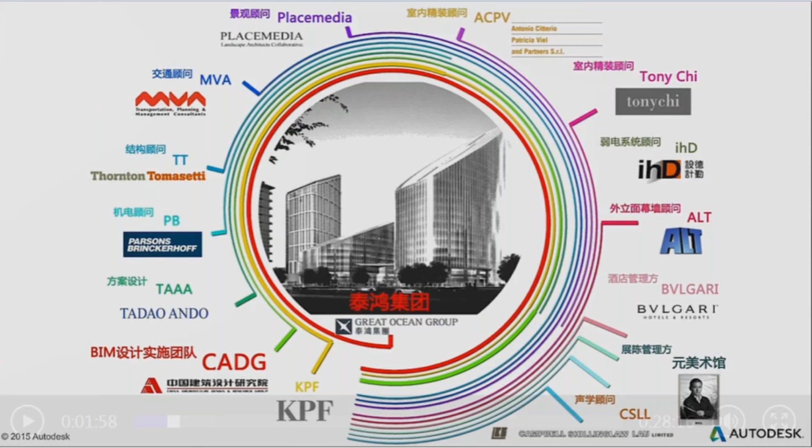Then COVID hit. Usage of remote access skyrocketed as designers and engineers worked from home. Autodesk responded with promotions to help these users become productive by using BIM 360. It seems like everybody was using BIM 360 to share design data.

But Autodesk has always had this vision of connecting all the people on the project. Design users needed to have their tools talk to each other, and construction users needed to have all up-to-date information for their people. And building owners, construction managers, and owners reps all needed to stay current with the data.

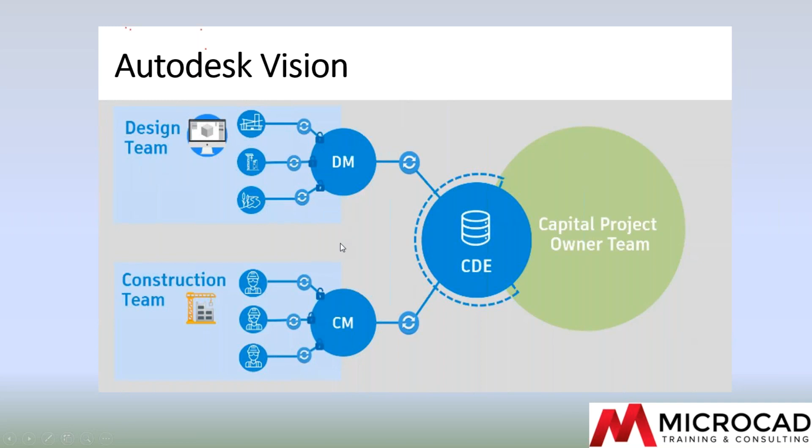With Autodesk's first early product called Team, it was the Revit users that were connected. With BIM 360, it expanded to the entire design team, but it missed connecting to the construction group because they were on a different platform, the Autodesk Construction Cloud.

This was an important gap because of the huge benefits that could be gained by the integration of the data, but also more and more the lines between designers, construction administration, coordination, and owner reps were blurring. Every organization was branching out to create new revenue streams, resulting in their involvement in more activities in the project. So designers were doing construction functions, and some construction people were involved in design functions.

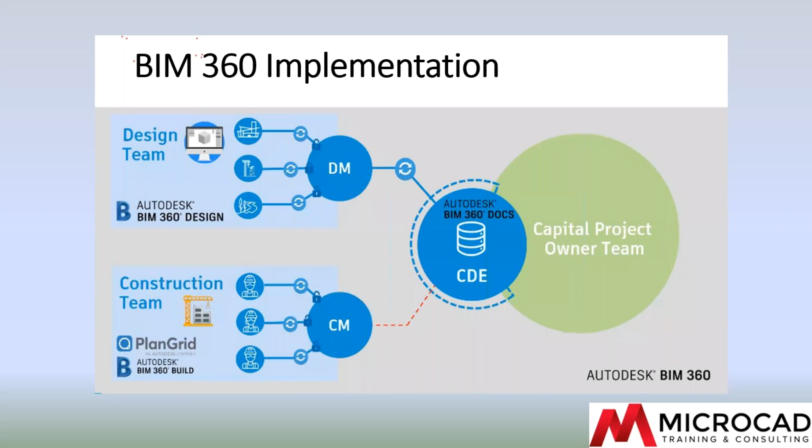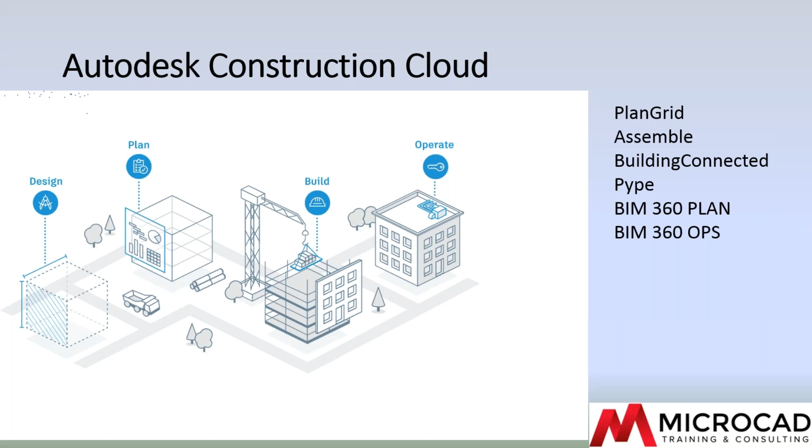So now Autodesk has connected all the members of a team on a common data platform, the unified platform. Data can be shared seamlessly from conceptual design through construction to operation of the facility, and all the stakeholders can access information anywhere on any device.

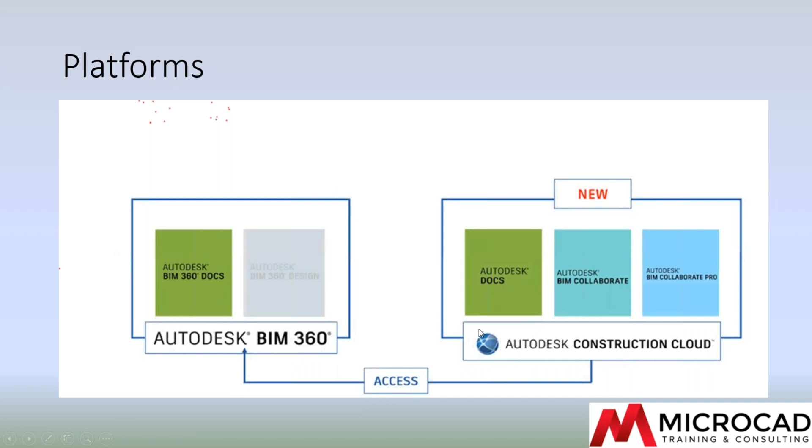The key feature of these products is the ability to use the unified platform within Autodesk Construction Cloud. Currently, BIM 360 Docs and BIM 360 Design operate within the Autodesk BIM 360 platform. The new products, Docs, BIM Collaborate, and BIM Collaborate Pro, are able to work on the unified platform and also on the BIM 360 platform. So you have access to either of these platforms with the new products.

Autodesk Docs is a document management product for all partners in the project. It controls versions in the cloud, so every user is guaranteed the most recent data. Users can set permissions to control who has access and what kind of access. It allows users to view, measure, and mark up models and drawings. It provides the capability to create and manage issues, assign them to individuals, and give a due date.

What is significantly different with Autodesk Docs is that it allows bring your own subscription. What this means is that each organization's Autodesk Docs subscriptions could be used on anybody's projects once you are invited. This is a more predictable way of getting entitlements.

BIM 360 Docs works differently. For BIM 360 Docs, whoever owned the data had to provide the BIM 360 Docs entitlements. Another major point that's different about Autodesk Docs is that this is included in the AEC collection. This means every Revit or AutoCAD user who has the AEC collection has access to cloud data sharing. Autodesk wants all of the software users to be able to work with cloud data.

Autodesk Docs is not available outside of the collection. The interface for Autodesk Docs is fairly intuitive and similar to BIM 360 Docs. Files are organized by project and folders within the projects. For each Revit model, both the 3D representation and sets of drawings are available. It's an intelligent model, so you can query the properties of an object in the model.

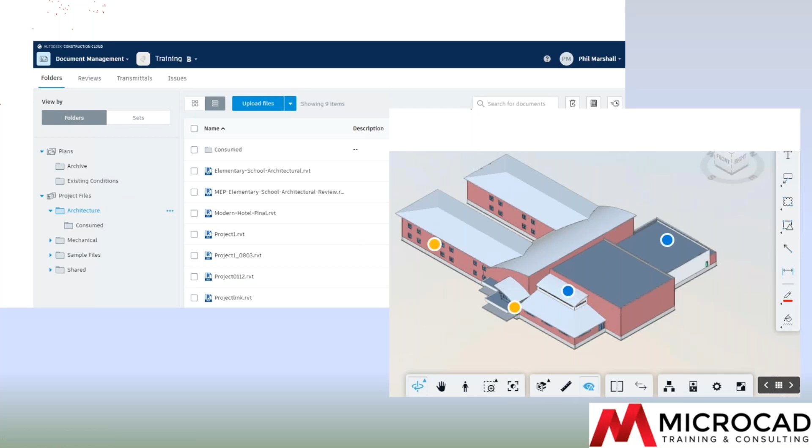Let's take a quick look at what that might look like.

So here we are looking at a particular project. We could have a number of different projects that we're involved with, but we're choosing one particular project. Within this project, we have a set of folders that we could use. Then within the folders, we can establish permissions of who has access to look at, to view, to edit, and work with these particular files.

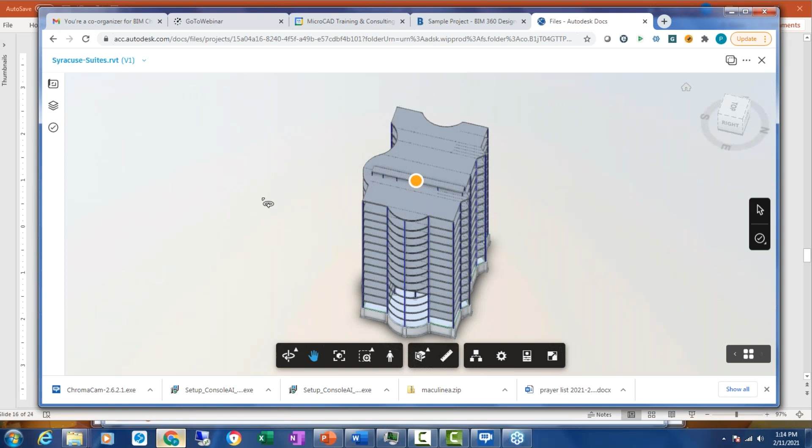So if we grab one of these files, this is a Revit model. And as with any Revit model, we certainly have the ability to do things like view, pan, zoom, orbit, and have all of these abilities for sectioning. So we could look at the inside of the building, slice it, see what's going on right here. So even if it's a complex model, we have a lot of understanding of what's going on with that model.

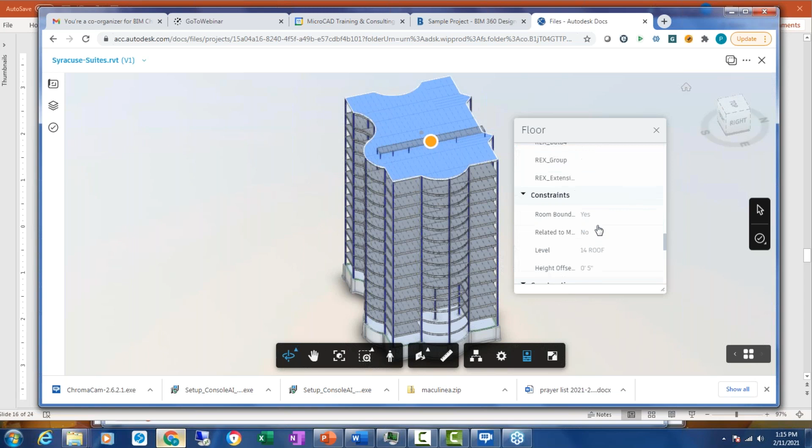It is a Revit intelligent model. So if we pick an object, like I'll pick that particular floor, we can look at the properties of that floor and see that it's lightweight concrete on metal deck. We'd have the rebar information, and we'd have things like weights and center of gravities, the strength of the concrete, and whether or not it's been involved in an analysis. So we have all the information about that particular object.

The second product I'd like to mention briefly is Autodesk BIM Collaborate, which is aimed at project participants who need to be involved in the review and approval process, but aren't authors. So these might be people like the design managers, the project leaders, maybe some client personnel, people who need to be aware of what's going on, but are not going to be the authors.

This product includes all the features of Autodesk Docs, plus model coordination and design collaboration. Model coordination allows users to find and manage interferences. Design collaboration lets users participate in review workflows, see the design packages released by the various teams, and review the history of the design releases. It's not intended for the engineers and designers who are authoring models.

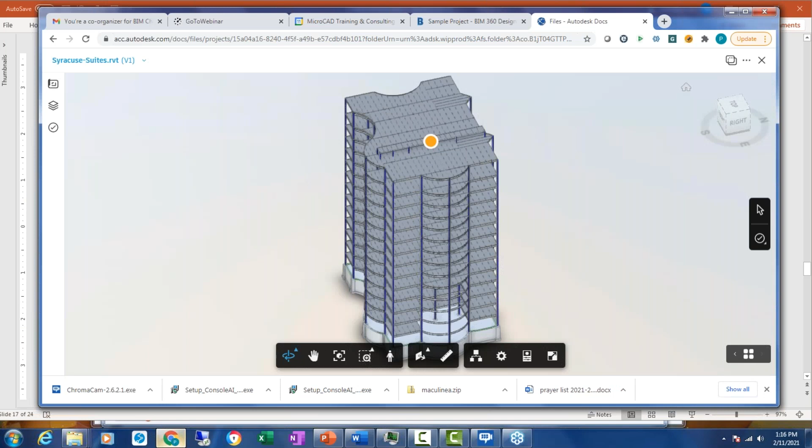So let's take a quick look at what that might look like. So here is a project that has many teams involved with it. Just like most BIM projects, the work is done by different teams. It could be these teams represent different groups within your own company if you were a design build organization, or it could be these teams represent individual companies that are participating in the project.

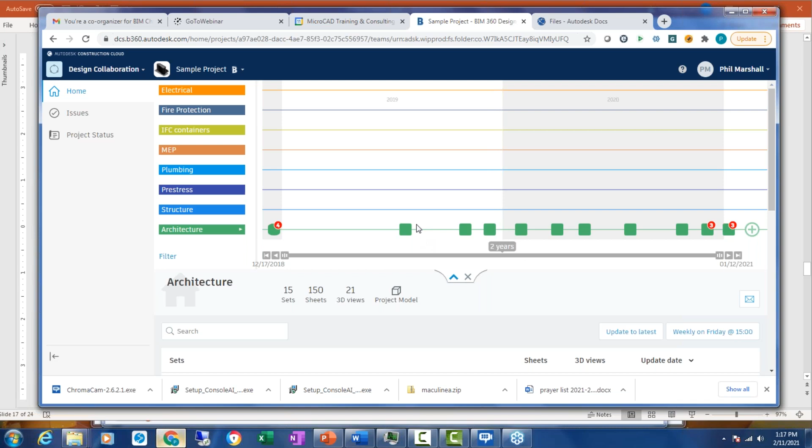Each of these teams has a swim lane timeline that represents the design packages that they've released. So in this particular project, it looks like the architecture group has released all the packages. And so we could look at any of these packages and see what drawings, what documents are in that particular package and review them as necessary.

All of the other teams, when they release their packages, we would see dots up on the timeline to show when these are released. So as a reviewer or a manager of the project, you would have the information about the status of the design collaboration.

You can look at the documents and the models that are in each of these release packages, but you wouldn't have the ability to change them. You would have the ability to redline, mark up, create issues, but you wouldn't have the ability to change the model itself.

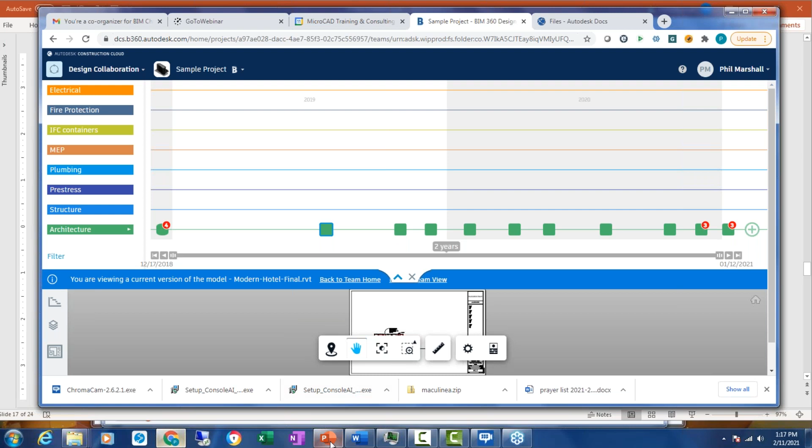So that was the Autodesk BIM Collaborate tool. The third tool I wanted to talk about is Autodesk BIM Collaborate Pro, and this is intended for authors. This is the tool that replaces BIM 360 Design. It serves the engineers and designers who are actually creating or authoring the models.

All of the features of Autodesk Docs and Autodesk BIM Collaborate are included. It has tight integrations with Revit, Civil 3D, and Plant 3D, so the users can stay within the authoring application and get the benefits of cloud data management without having to jump from app to app.

What's new here is that Autodesk BIM Collaborate Pro includes model coordination. So the authoring Revit user can use this tool to find and manage interferences between the cloud models. I've got a short video we can take a look at here.

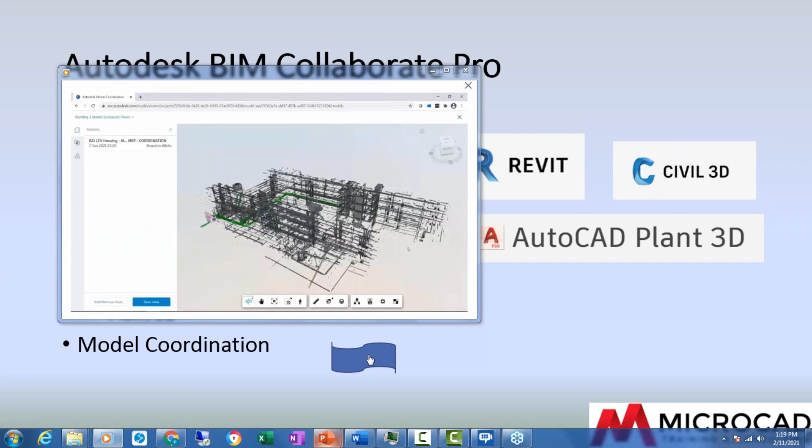So the idea with model coordination is you bring the different discipline models together, specify the models that you want to bring together as a single consolidated model. And then in that single consolidated model, we can do interference checking between any two models already in there. So we might do steel against piping, or we could do structure against MEP.

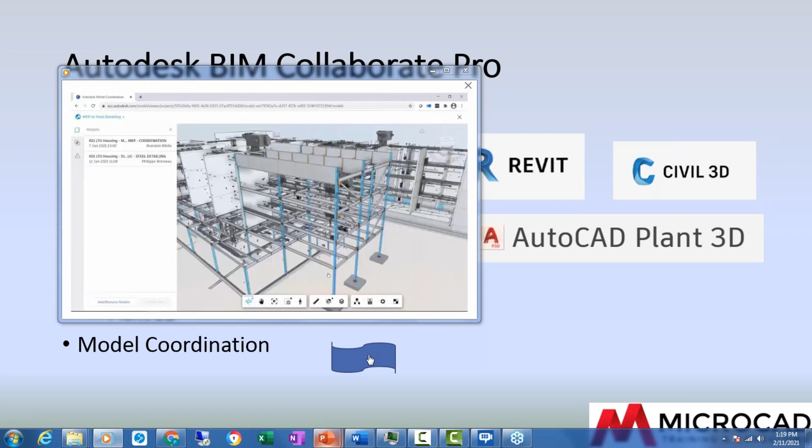We can create views and save those views so it's easier for people to review the model and the interferences, if there are any, easily after the fact. You can look at interferences between any of these models because you have many different models here for the different disciplines. And for each of the interferences it finds, it allows you to zoom into that particular interference, find the objects that are interfering, the amount of the interference, and allows you to create an issue.

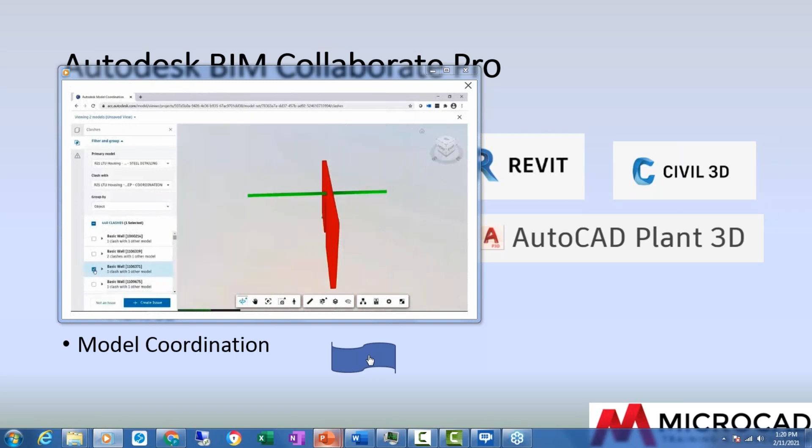So if there is something that needs to be remedied, you can create an issue, detail out what the problem is, although in this case it's pretty obvious, specify who you're expecting to remedy the problem, and give them a due date for the remedy.

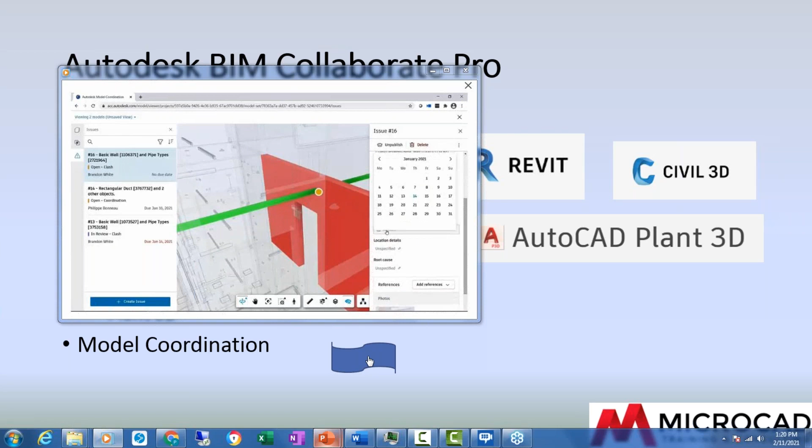All of these issues are maintained in the database, so you have a history and the audit trail to see what issues were created and how were they solved.

And now with the Autodesk Issues in Revit plugin that all the Revit users should have, in Revit they would see these issues also, and it gives you the ability to manage those issues from Revit without having to go into another application.

So model coordination gives you the ability to find those interferences, manage the interferences, and share them with the authors. Right now, within Revit, you can see those issues, and they would be identified as coordination issues with this interference. So you can look at just the coordination problems, issues in Revit if you wanted to.

So let's talk about existing users, because looking at the people who registered, it appears that quite a few of you are existing users of Autodesk Cloud tools. If right now you have AEC collection licenses, Autodesk will add the entitlement to Autodesk Docs to your license. In fact, they've already done that. Effectively last Tuesday, Autodesk went through and modified the entitlements for all users, so if you had the AEC collection, now you have an entitlement for Autodesk Docs in your account management area.